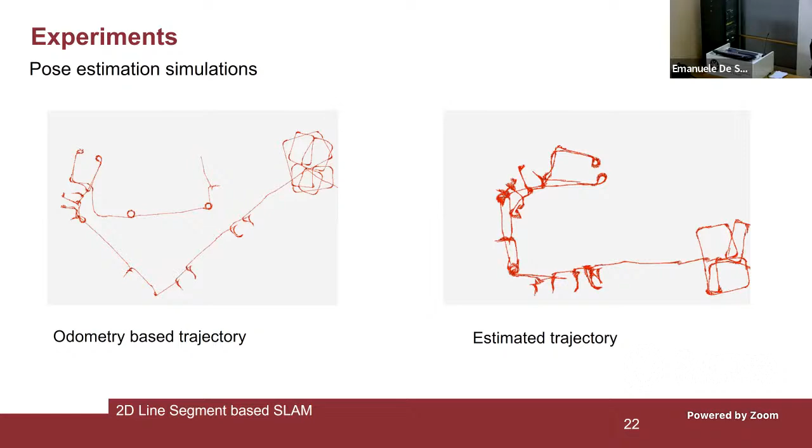To conclude, we have provided a line extraction algorithm that takes scanner points along with the noise model into consideration, an iterative closest line mechanism that has been developed to estimate the robot trajectory, and a data association mechanism to determine corresponding sets of inlier lines.

Future work includes a mechanism to determine previously visited landmarks to tackle loop closure more effectively, a global optimization of the mapping of lines with respect to estimated poses, and more complex features like blobs or curves may be implemented and taken into consideration later.

I thank you all for your attention, and I'll be happy to answer any questions.

Any questions for Imam? Before that, I have one.

I think there are many line extraction algorithms, and indeed your interest here is in the context of SLAM. So you're looking at sequential images and how you relate the information you've gathered so far to improve the next information. Can you specify the special contribution of your thesis in this field with respect to the state of the art? The contribution of the thesis is basically taking the line, not using standard image-based algorithms, but the estimation of line segments.

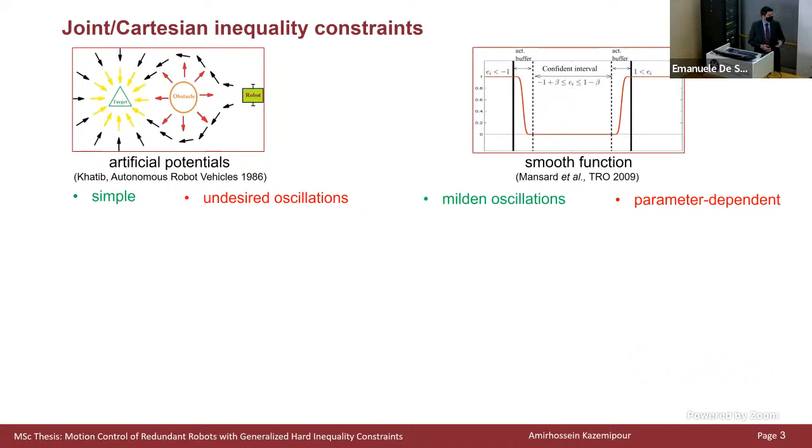Now let us quickly review the state of the art. So a conventional method for satisfying joint and Cartesian inequalities is to use artificial potentials, which can also be combined with some smooth activation functions. But the downside is that they usually suffer from oscillations, or they require parameter tuning to select the most appropriate parameters. As an alternative, we can use constrained optimization techniques, such as quadratic programming, by basically transforming the task into least squares problems. However, these numerical methods tend to be computationally expensive, and they do not always give us a realizable solution.

And finally, we have the saturation in the null space, or SNS for short, which connects the quadratic programming to the stack of tasks approach and overcomes all these challenges. So in the original paper, the joint motion limits were treated as hard bounds that can never be violated. However, the hard bounds in the Cartesian space were not explicitly taken into account. Now let's move on.

So here are the contributions of our work. So here we propose a generalized version of the saturation in the null space method that explicitly takes into account both joint and Cartesian inequality constraints in a unified manner. Therefore, all the constraints have the same priority. And also, these constraints can never be violated, so they are treated as hard bounds. And we can modify these constraints online and in real time without undergoing any parameter tuning phase in response to any modifications that can happen in the set of constraints.

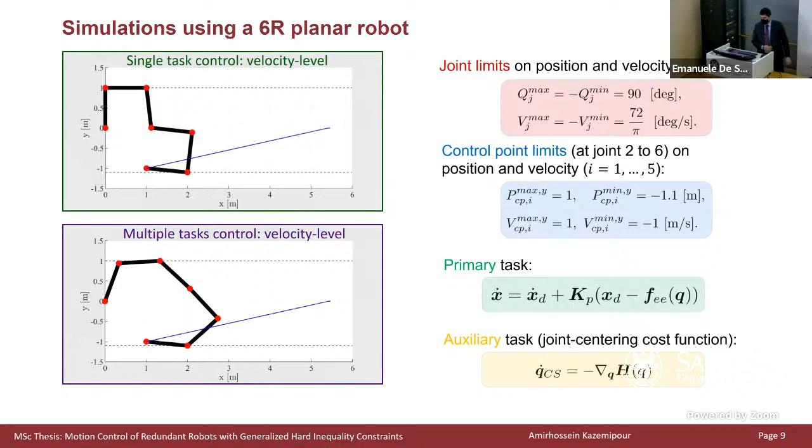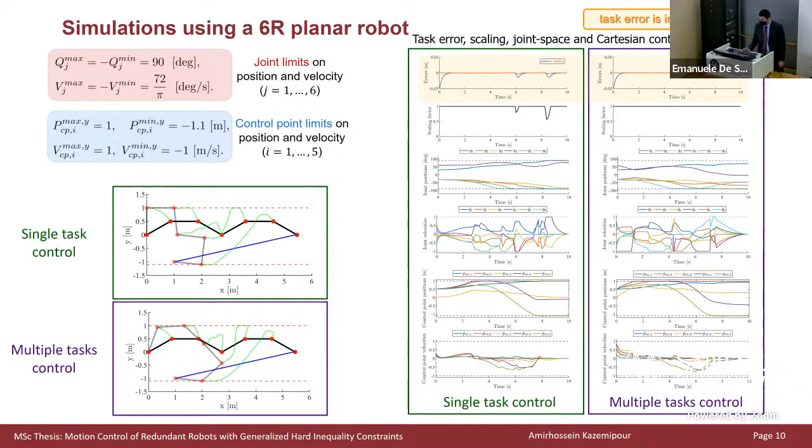We have also validated our framework using experiments with the KUKA lightweight robots that we have in the lab. So in the first experiment, we considered a single control point at the elbow of the robot. And so we considered some fixed joint and Cartesian limits, and we also imposed some time-varying constraints on the position of the elbow that are imposed only for some short time intervals.

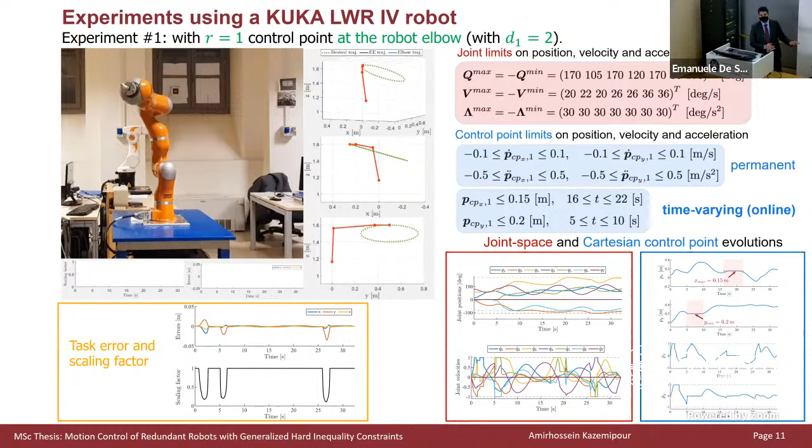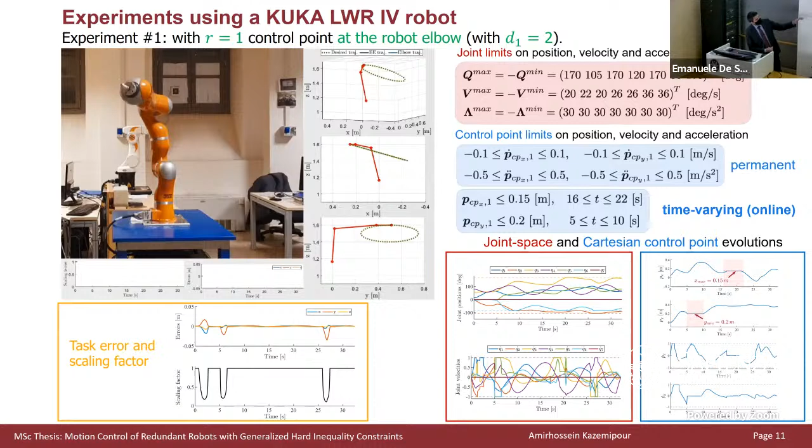So as you can see from the video, the desired end effector task is to track a circle 3 times. And as you can see, the robot does a great job at fulfilling this primary task while satisfying all the generalized constraints. And you can see how well our controller reacts to the time-varying constraints in the y direction. And finally, the scaling strategy that we have implemented, as you can see, nicely keeps the geometry of the path, therefore ensuring its usability.

In the second experiment, again, we consider a single control point, but this time at the end effector of the robot. Here we also considered a more demanding task with a higher velocity to essentially bring the robot up to its physical limitations. Again, we imposed some fixed joint and Cartesian limits, and we also considered time-dependent constraints on the position of the end effector.

So as you can see from the video, here the desired end effector task is to follow a circle 3 times. And as you can see here, the time-dependent constraints that we have imposed in fact conflict with the primary end effector task. So during this time interval, the end effector saturates to its limit to comply with the constraint. And in fact, as you can see, during the second round of the trajectory, the circle is nicely cut without showing any oscillations.

Okay, so we have also extended the previous algorithm at the acceleration level command. This is in fact the most complex algorithm among all the ones that we have developed. We can use this in situations where the robot has to perform some dynamic tasks, or we can use it with, for example, an inverse dynamics controller to command also torque-controlled robots.

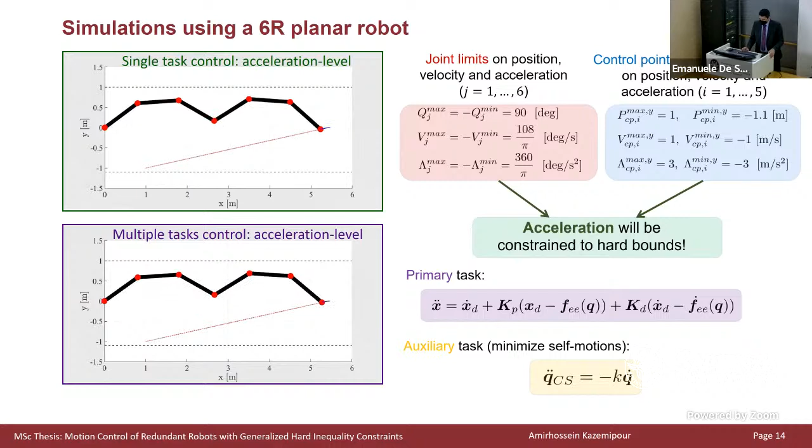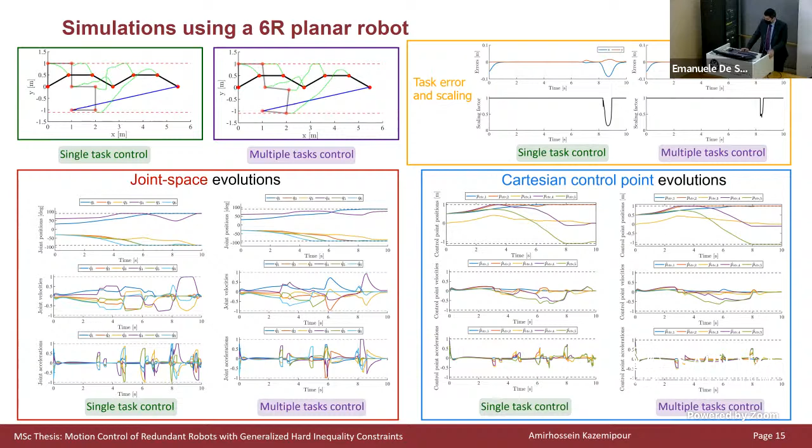Okay, let's move on. We also validated our framework at the acceleration level command, again considering a 6-DOF planar robot here. And as you can see again, in both single task and multiple task control, the task is perfectly executed. And also all the constraints are satisfied, as you can see from the joint space and Cartesian control point evolutions. And again, with multiple task control, the task error is greatly improved compared to the single task control.

So as conclusions, let me wrap up the main points. So in this work, we presented several motion control algorithms for redundancy resolution, considering joint and Cartesian hard inequality constraints. And the resulting control algorithms that we have developed in this work, in fact, can be regarded as a generic toolbox that can be used in a variety of robotic operations. In fact, the main advantages of our framework are performance and the ability to adapt to sudden changes in the time-varying constraints.

So as our framework can handle time-dependent constraints, we can basically incorporate it into any sensor-based strategy, for instance, in human-robot collaborations, to prevent collisions between humans or other robots.

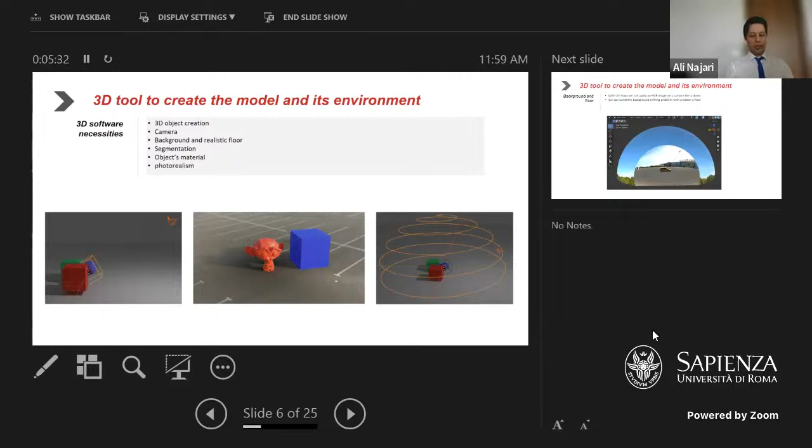Okay, in terms of simulation of the background and the floor, as we didn't want to simulate everything in the scene, for example, we didn't want to simulate a building, trees and other stuff in the scene, we just used the 2D image, and by UV maps, we mapped this image on a surface like a dome, as you can see here in this picture. And with this method, we can avoid the background shifting problem with the creation of floors.

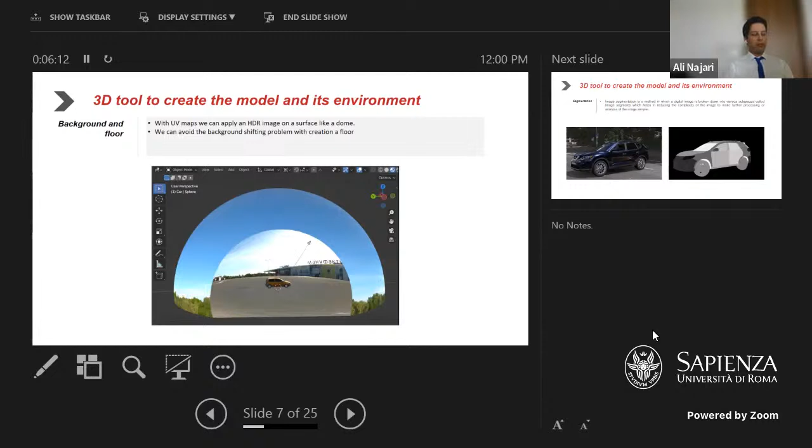And in terms of the segmentation, as you can see here in the car model, image segmentation actually is a method in which a digital image is broken into various subgroups called image segments, which helps in reducing the complexity of the image to make further processing or analysis of the image simpler. And in the right figure, you can see a segmented image from the car model.

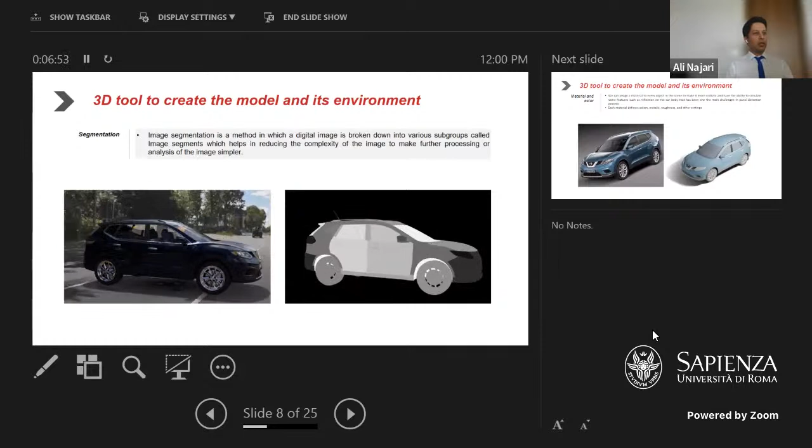And in terms of the material and color in Blender software, we can assign a material to every object in the scene to make it more realistic and have the ability to simulate some features such as reflection on the car body, which has been one of the main challenges in the panel detection process. Each material defines different features such as colors, metallicness, roughness, and other settings.

As you can see here, the right picture is a simple one. By changing the material, the color, and other settings, we were able to create a car model that is really like a real car.

And in terms of photorealism, the key to making photorealistic material is to reproduce imperfections. As you can see in the picture, we are able to easily simulate the reflections of the trees and the light, and also the different materials that we use for the scene preparation, such as plastic, leather, and metal, you can see in this image.

Okay, in terms of Blender workflow, we should have our 3D scene. Then we are going to define a new path and set the camera to this path. We are going to enable a new car model, as we already have different car models in the prepared scene. Then we select a new background. There will be also different backgrounds, and we start the rendering scene with a specific color.

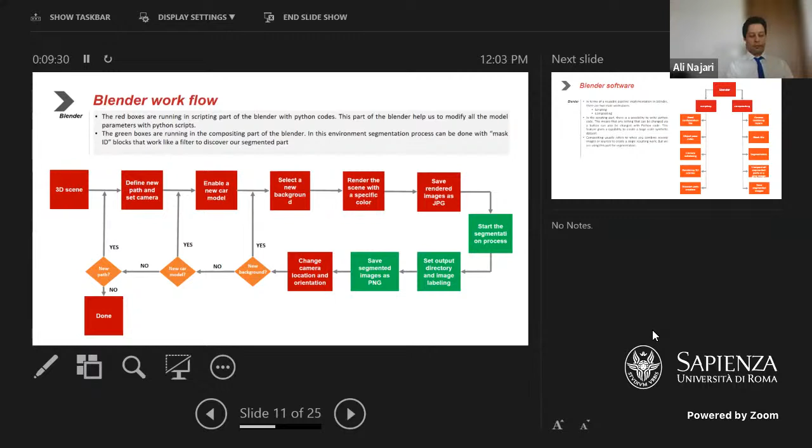If there is not, we go to the next step to enable a new car model. Then we go to other steps. If there is not any new car model, we go through the new path and other steps. When we have done all these loops, we are finished with the process of rendering.

In terms of Blender software, we are using two main workspaces. The first one is scripting, and the second is compositing. In the scripting part, we are going to do read configuration file, dedication of pass indexes, camera initializing, rendering 3D scenes, and random path creation. In the compositing part, we are doing access rendering layers, mask IDs, segmentation, compact all segmented parts in a gray image, and save all the segmented images.

And in the scripting workspace of Blender, we have a configuration file. This file is a CSV file where all the car parts with a standard name are listed. We are using these names to find the related object in the scene. Then we go to dedication of the pass index.

The camera position and orientation can be modified with two different methods. One is orbital point of view, and the other is to define a path and set the camera to follow this path. In the final version of this pipeline, we are using the second method. In the rendering part, we are choosing the quality and the output format of the 2D image plus the directory. We are going to save the rendered image in this step.

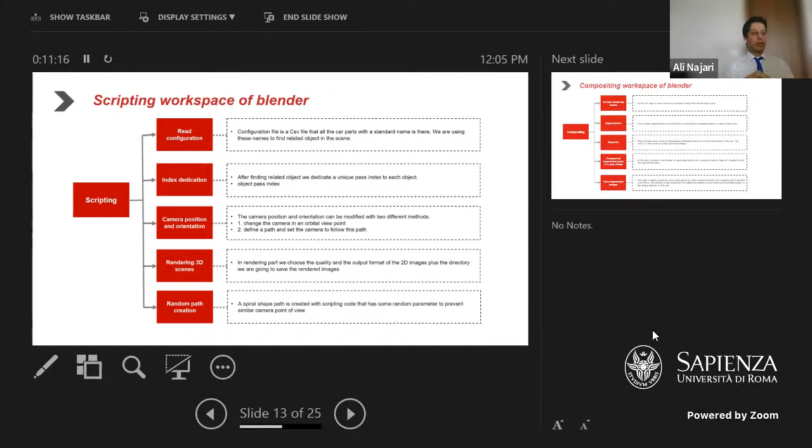And a spiral shape path is also created with the scripting code that has some random parameters to prevent similar camera points of view. And in the compositing part, at first we need to have access to the rendered image from the render layer node. Then we go through grayscale segmentation in the compositing workspace based on object pass index.

And mask IDs are some nodes in the compositing workspace that let us find each panel of the car. The output of this block is white and black images. Then all these white and black images need to be compacted to a gray image. We are going to do it in the next step. And we also need to define a directory and a new name for every rendered image for the scripting part to prevent overwriting.

For the post-processing, we need to read necessary directories, read the YAML configuration file, and consider necessary annotation merging. Then we open the main directory and read the rendered image.

At the next step, the related segmented image should be read. By reading this segmented image, we are able to generate all the information necessary for our large-scale dataset: polygonal annotations, bounding box annotations, image IDs, and category IDs.

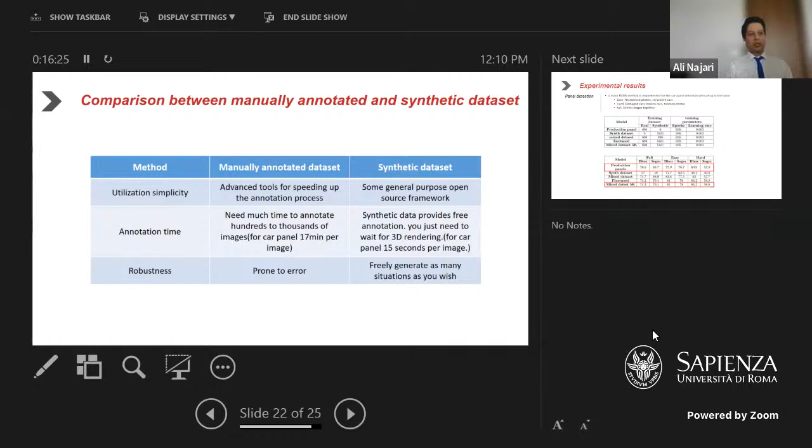And in terms of robustness, manually annotated datasets are prone to errors, but in the synthetic dataset we can freely generate as many situations as we want.

In terms of the experimental results, we used the generated dataset with this pipeline and a deep learning method called mask RCNN, implemented for car panel detection with the setup shown in this table.

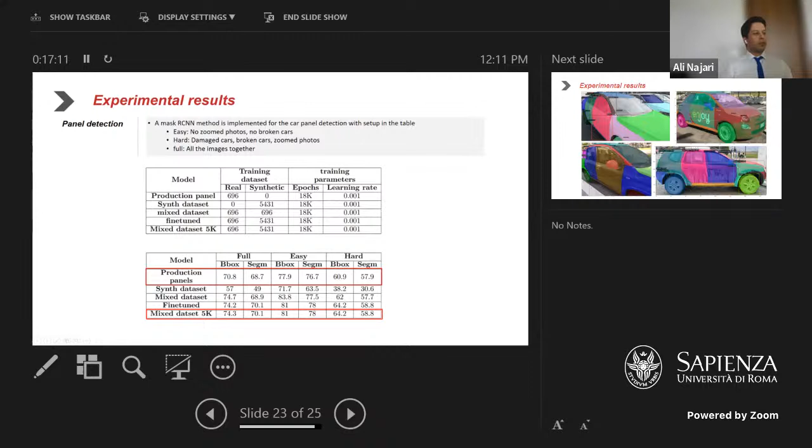As you can see here, for the mixed dataset of 5,000 images, we were able to improve the final results of this panel detection method. And these are some results about this panel detection algorithm.

As you can see, the method was able to detect different panels of the car with a certain level of precision.

In terms of conclusion, we developed a methodology that generates a reusable pipeline. This methodology has been validated with the generation of a synthetic car dataset.

Human labeled datasets are expensive and time-consuming. We can complete this time-consuming and costly procedure in the shortest amount of time, and a mixed dataset of human labeled data and synthetic data can yield better final results. The whole pipeline is also implemented on the cloud.

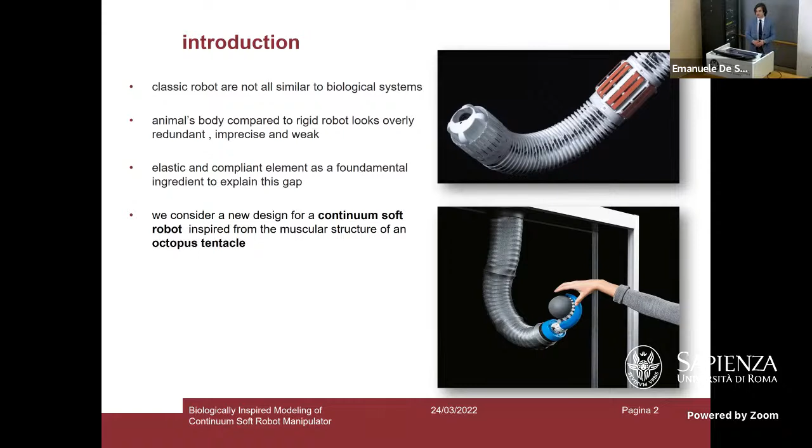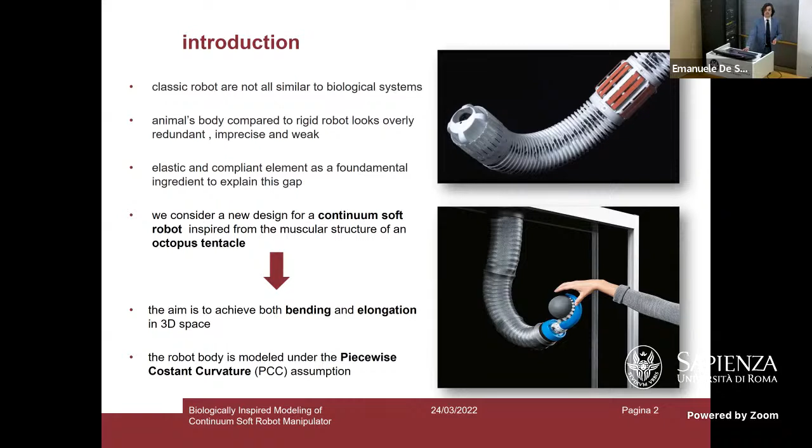In this work, we consider a new design for a continuum soft robot inspired by an octopus tentacle. The aim is to achieve both bending and elongation in 3D space. Finally, the body of the robot is modeled under the piecewise constant curvature assumption.

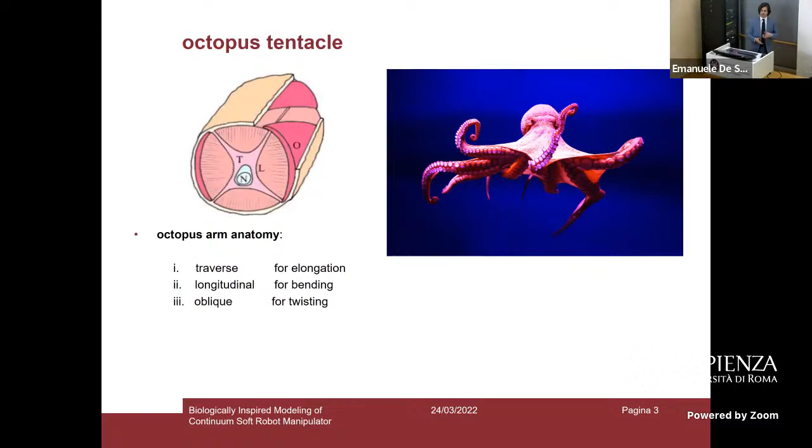If we consider the octopus, they are a great example of dexterous animals found in nature. In their arms, the muscular structure is organized mainly into 3 groups: the transverse muscle for elongation, longitudinal for bending, and oblique for twisting. What we do is merge the elongation and bending features into 4 pneumatic artificial muscles able to change in length.

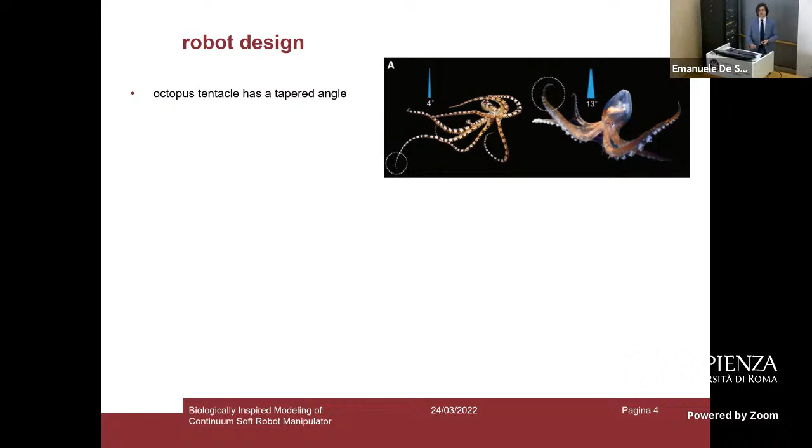Commonly, in the state of the art, a cylindrical structure is used in order to replicate a biologically inspired segment. However, we have to consider that in nature, an octopus tentacle has a tapered angle. So here we come with our design: four constant curvature actuators displaced every 90 degrees that can change in length and elongate the structure of the segment, changing the tapered angle.

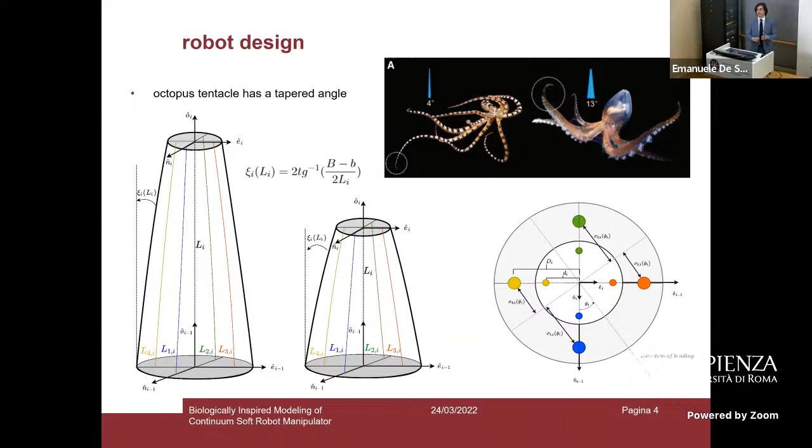But to describe what happens when the tapered segment bends, we need at least 3 variables: Phi, the angle between the plane NO and the curvature plane; Theta, the relative rotation between 2 reference frames on the bending plane; and delta L, the change in length of the backbone segment. We are going to call this choice of variables the alpha parameterization.

Moreover, the tapered segment is advantageous for the arm's mobility since it allocates more torque to the segment closer to the base. However, it introduces a quite difficult challenge since the 4 arcs bend on non-parallel planes. We solve this issue with an exact geometric solution that gives us the length of each cable when the segment is bending as a function of the alpha parameterization.

So entering the kinematic modeling, a piecewise constant curvature robot is composed of a fixed number of segments continuously deformable, with a curvature that is constant in space and variable in time. The homogeneous transformation matrix T maps the posture of 2 consecutive reference frames, and we can give it a geometric interpretation since we can consider it as a rotation around the z-axis of an angle phi, times the multiplication of a roto-translation until we reach the next frame on top of the segment, and then we come back in the original framework with a rotation of minus phi around again the z-axis.

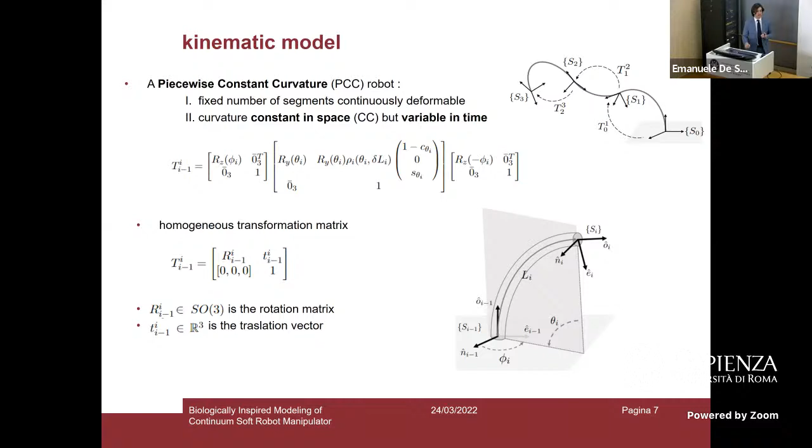But the alpha parameterization is affected by mainly three problems. First, the straight configuration can be described by an infinite choice of the variable alpha. In fact, the homogeneous transformation matrix is not an isomorphism. That means we could wrongly think that keeping the angle theta constant at 0 and varying the angle phi could generate motion, but that's not the case. Second, two different configurations that share those properties describe the same posture.

And finally, closeness in the task space is not equivalent to closeness in the configuration space. But how to solve this issue? In fact, it's just a matter of parameterization. If we choose to project the angle theta along the x and the y axis, we solve all three issues. We're going to call this parameterization the Q parameterization.

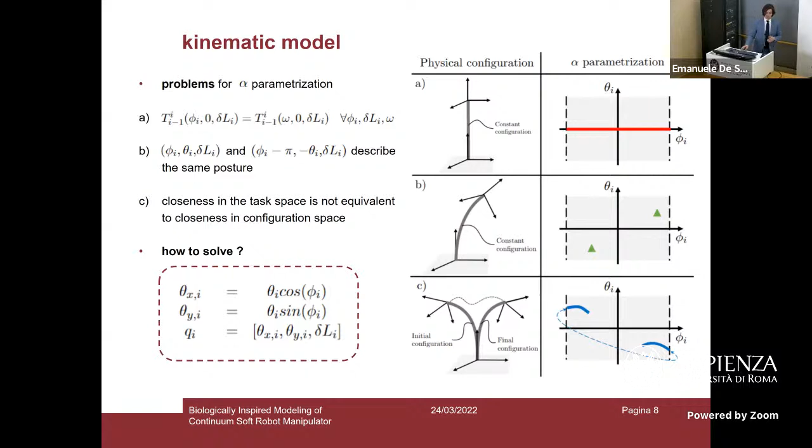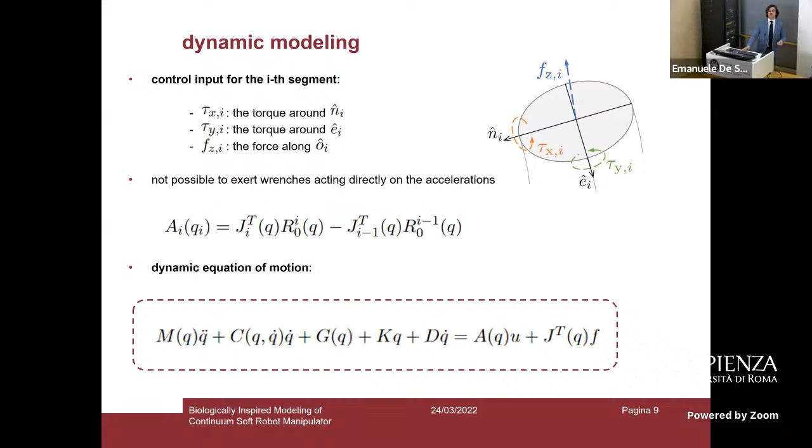For the control input of each segment, we consider the wrenches composed by tau x, the torque around the n-axis, tau y, the torque around E, and the force along the O-axis. However, we have to consider that it's not possible to exert wrenches directly on the acceleration, so we need an input mapping A. And since the wrench is internal of the segment, we have to consider that at the previous link, an opposite wrench appears. Then, by means of an Euler-Lagrangian approach, we derive the dynamic equation of motion.

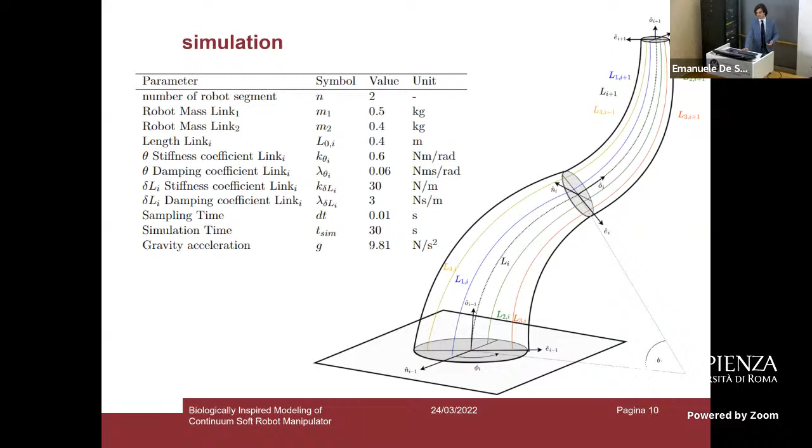We start from an initial configuration that is straight facing downward, which recall was a singular configuration for the alpha parameterization. We will plan in alpha and then move to Q, just because the alpha parameterization is meaningful with respect to the direct representation of the posture of the robot.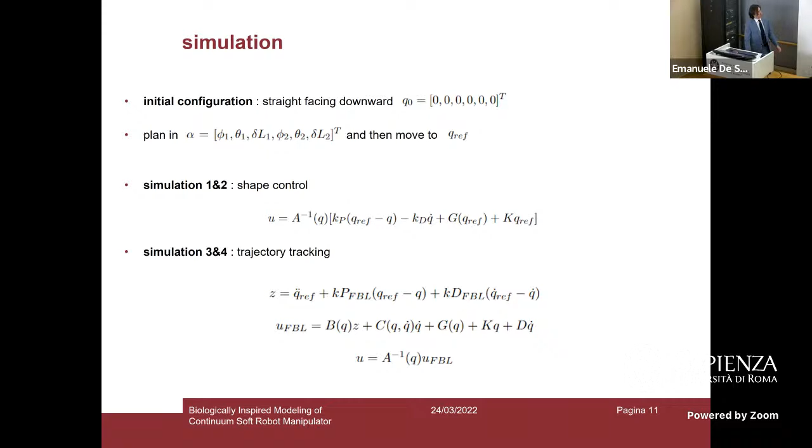We're going to see two simulation scenarios. The first will address the shape control of the robot, using a control law composed by a PD plus a gravity cancellation term. For the last two sets of simulations, we will address the trajectory tracking problem, using a feedback linearization control law.

So for the first simulation, we ask the robot to reach two different configurations, alpha 1 and, after 15 seconds, alpha 2. Recall that we have to move to the Q parameterization and compute Q1 and Q2.

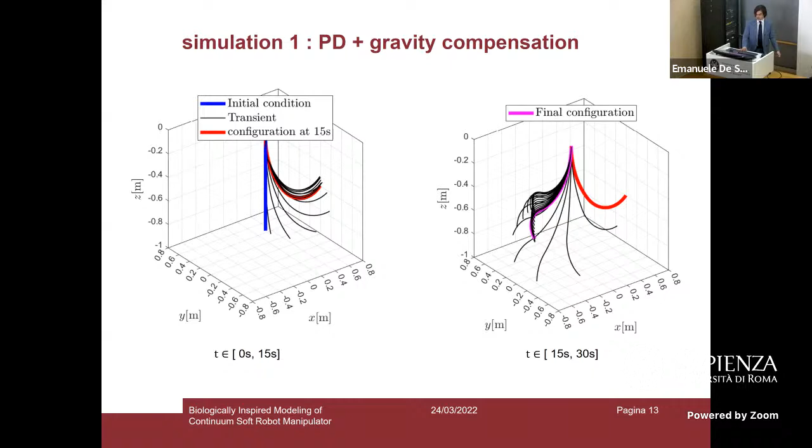Here we can have a visualization of what is happening. From the first picture, we see the first 15 seconds. In blue is the initial configuration. The robot is starting from a straight facing down configuration and then quickly moves to the first configuration in red. Then in the other plot, we start from the previous configuration and reach the final reference in purple.

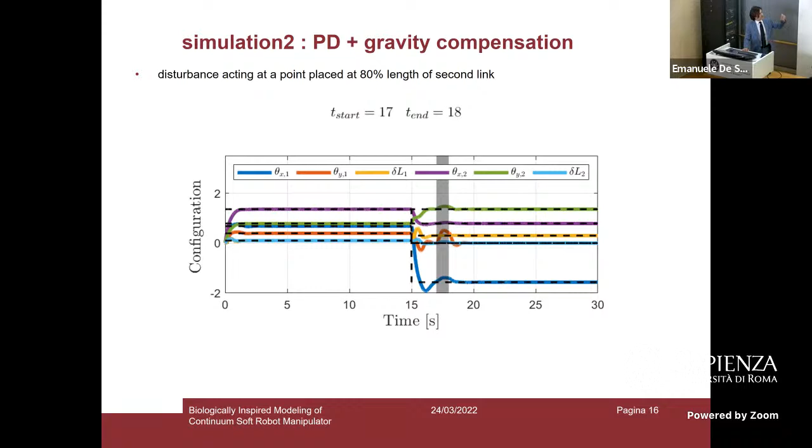Now for the second scenario and the third simulation, we ask the robot to move from configuration alpha 1 and reach configuration alpha 2 using a specific trajectory. We compute this trajectory in Q as a quintic polynomial.

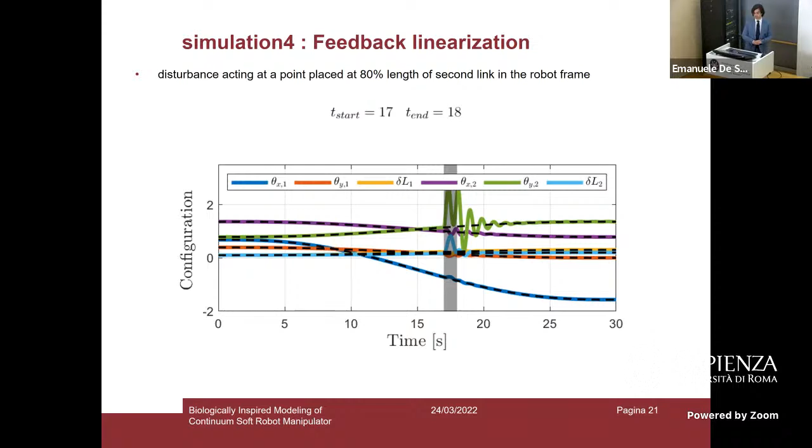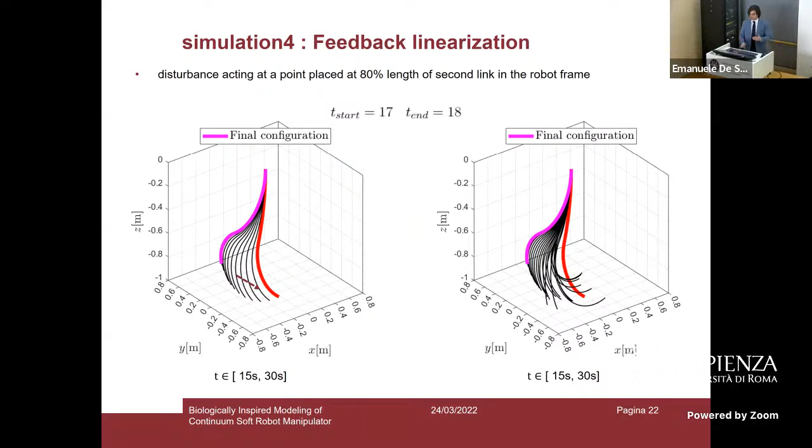Here we see how the robot behaves differently when the same disturbance acts at 80% length of the second link. In fact, we see that the robot starts to oscillate when the disturbance acts. So the red arrow again is the disturbance acting on the robot, and we see that the robot starts to physically oscillate until it comes back to the desired configuration. This reflects also in the error and in the input of the system.

So to conclude, we have presented a new design for a tapered, pneumatically actuated, soft robotic arm. And this work represents a great example of biomimetics, that means the translation of biology into robotics. We have validated the model in 3D environment for a PCC soft robot while performing bending and elongation maneuvers.

For what concerns further development, there are open challenges in sensing and proprioception, and moreover, we could add twisting features, and more important, there could be a model extension to include also a carried payload.

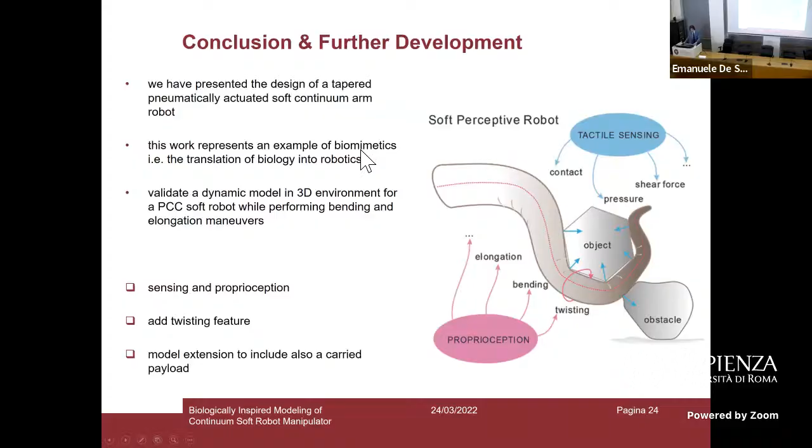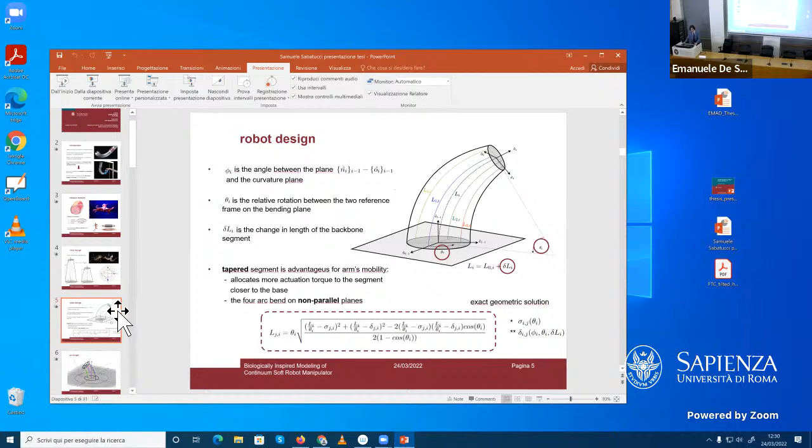Because we don't consider the twisting maneuver in the model. So we just consider that when we consider the segment that bends, we see that the bending does not affect the orientation of the top reference of the segment. That's a feature that could be added in the follow-up of this work.

Yes, it's exactly that. It's a plane, but could be any plane. Okay. In fact, it is correct to say that you can have one bending plane for the first segment and a different bending plane, so that you get torsion through the segments. Between segments. Yes, between the 2 segments and have different bending planes. Not within the segment. Sure.

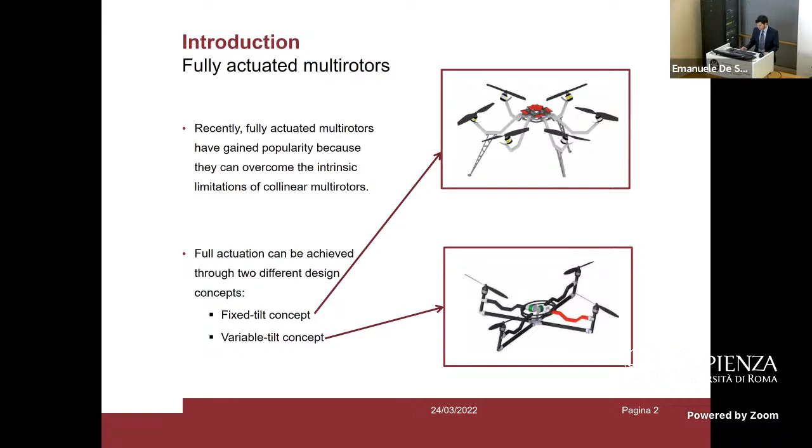The fault-tolerant control problem is the problem of controlling the multirotor, dealing with possible faults of the component. The objective is to propose an active control strategy in order to address both light and severe faults when the hexarotor is asked to follow a trajectory. It is active because it is based on a chain of two fundamental tasks: the fault diagnosis, which gathers the information about the fault, and the control reconfiguration, which accommodates the fault on the basis of this information.

We are focusing on a particular family of hexarotors, the alpha, beta, gamma hexarotor. In fact, since the i-th propeller is generically tilted, its orientation and position are parameterized by the angles alpha, beta, and gamma. As we can see in the top figure on the right, these three angles represent the rotations around the three axes, X, Y, and Z.

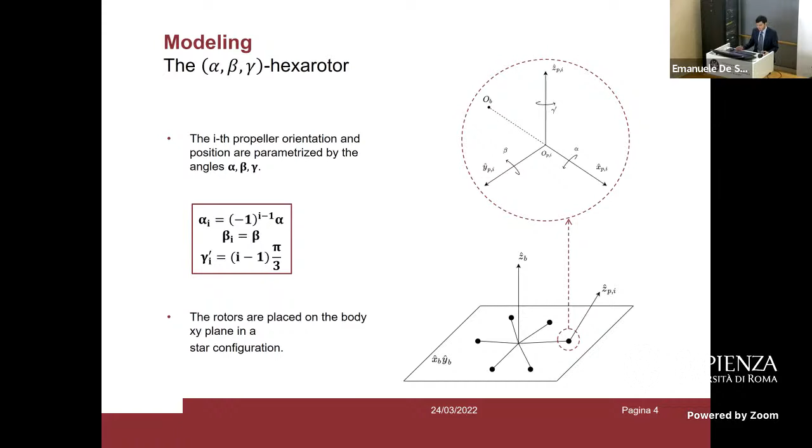With the choices made for this work, which are reported in the red rectangle, the hexarotor is considered with the propellers placed on a plane, the XY plane of the body, with a star configuration. The thrust is developed along the Z_Pi direction that we can see in the figure below, and this is determined by the angles alpha and beta in particular.

So from the Newton-Euler equations, which we can see in the first rectangle, we can derive a dynamic model where the position P is the position of the center of mass of the drone, V is the translational velocity of the center of mass, and as previously said, the attitude is represented in the special orthogonal group through the rotation matrix R. The angular velocity is omega expressed in the body frame. The inertia matrix J is diagonal.

Moreover, in a realistic scenario, we would have inputs to the system which are aerodynamic disturbances, external disturbances, and the gyroscopic torque. Moreover, in the equation there is the appearance of the wrench, which is Fc, tau c, so the vector of force and torque delivered by the fact that the propellers are spinning.

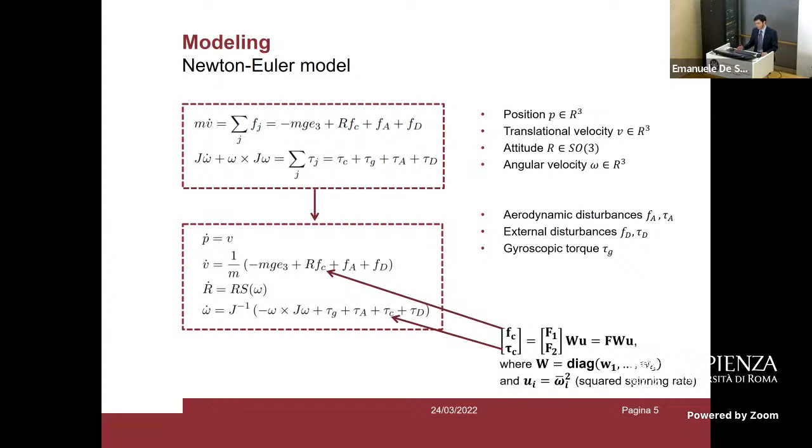So we are considering the actual control input U, which is taken as the square of the spinning rates, and it is mapped to the wrench through the input allocation matrix F, which is divided in F1 and F2. F1 maps the input to the force, and F2 maps the input to the torque tau c. Moreover, since we are dealing with faults, there is the pre-multiplication of the input U by this diagonal matrix W, which is made of the weights. Wi, in fact, is the i-th multiplicative weight, which represents the fault on the i-th rotor.

Through the study of the input allocation matrix, we discovered that the healthy hexarotor is decoupled and fully actuated, while instead the hexarotor with a loss of a rotor or two opposite rotors has a single decoupled direction. Decoupled means that the attitude and position subsystems are decoupled from one another.

In fact, we can define a direction which is called the preferential direction, which is in the kernel of F2, so the null space of the F2 matrix, and this can be mapped in the force space through the F1 matrix, defining d. The idea is that acting along this direction with the control, we can develop a force along d in the body frame which does not change the attitude.

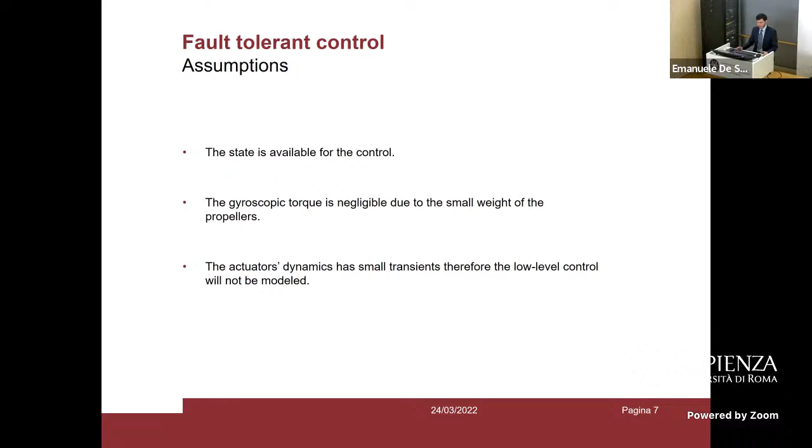The assumptions made for the control are that the state is available at any time, the gyroscopic torque is negligible, and the actuator dynamics have a small transient, therefore we will not include the low-level control. Here we can see an overview of the general control scheme.

In particular, below there is the fault diagnosis block, which provides an estimate of the multiplicative weight, W hat. On the left, this vector is tested in the logic condition. If all the components are greater than or equal to some threshold T, then the FA control law, which stands for fully actuated, is enabled and tries to preserve the full actuation of the hexarotor while dealing with light faults. Instead, if a component is less than the threshold, the control law is switched to the under-actuated control law.

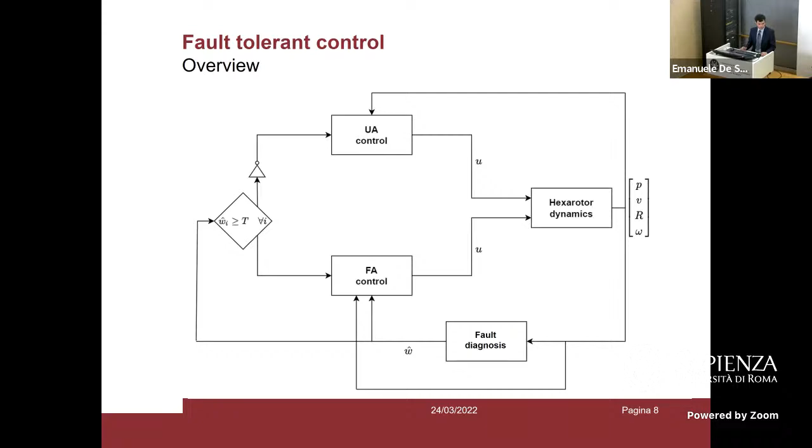Here we can see a detail of the FA control scheme. In particular, on the left, we have the references down to the acceleration level in terms of attitude and position. Then we have two blocks, the attitude stabilization and position stabilization blocks, which provide the high-level commands in terms of torque and force.

The torque tau c is developed using a geometric control on the special orthogonal group, while Fc, the force needed for the position control, is a PD plus gravity cancellation. The control allocation, on the basis of the estimate coming from the fault diagnosis, will deliver the actual control to the hexarotor, U.

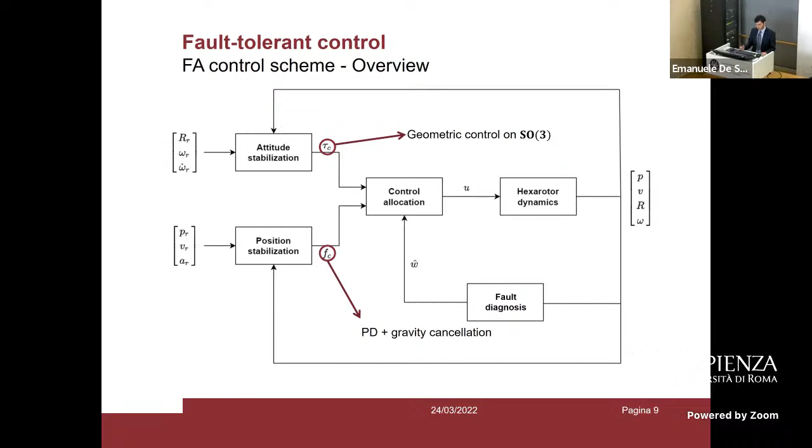As previously said, the fault diagnosis is implemented using a nonlinear disturbance observer, lambda, whose expression is in the first equation in the slide. We can see that there is the appearance of the H matrix, which is a diagonal matrix made of gains, which determine the convergence. Defining the estimation error, W tilde, which is W, the ground truth, minus the estimate, its dynamics is a linear time varying dynamics with input W dot.

So we can prove that the estimation error is bounded. And for this reason, also the closed loop system can be proved to be ultimately bounded. Moreover, another important result is that the control system is converging input, converging state, so CICS, with respect to the estimation error. This means that if the estimation error goes to 0, then the tracking errors also will converge.

In the case of a loss of a rotor or two opposite rotors, we have an underactuated system, so the control law is switched. And in order to prioritize the position tracking, we are using a nested feedback control structure, a classic one, where the position control will drive the attitude subsystem through the generation of a planned attitude represented by RP, the rotation matrix. This rotation matrix is aligning the preferential direction D to the desired force, which is needed for the position control. This means that D is conceptually similar to the upwards direction in case of classical collinear multirotors.

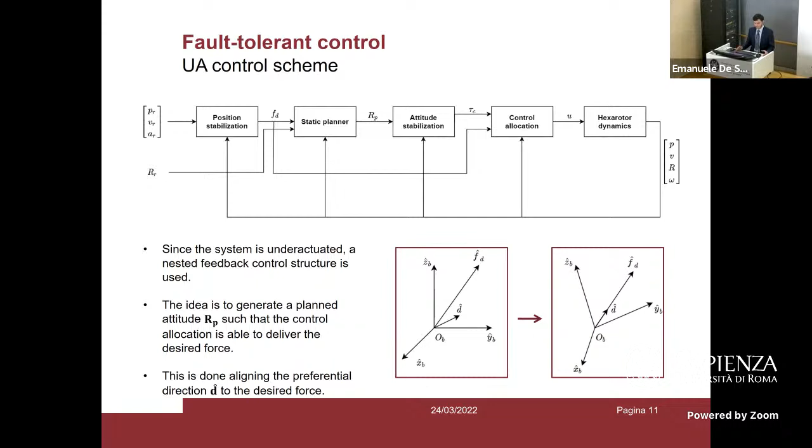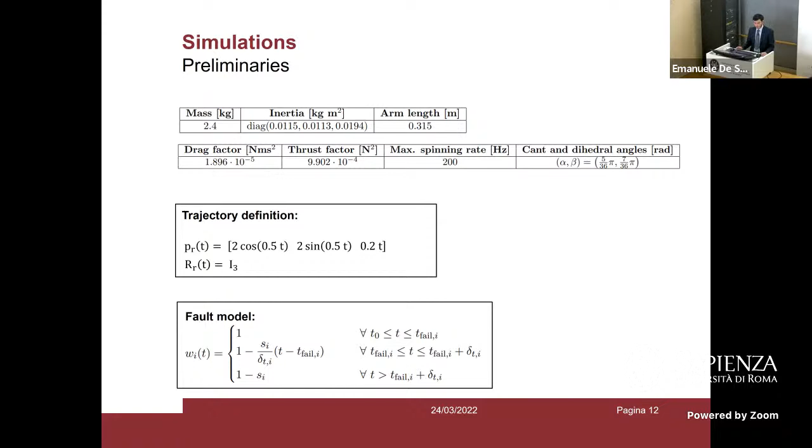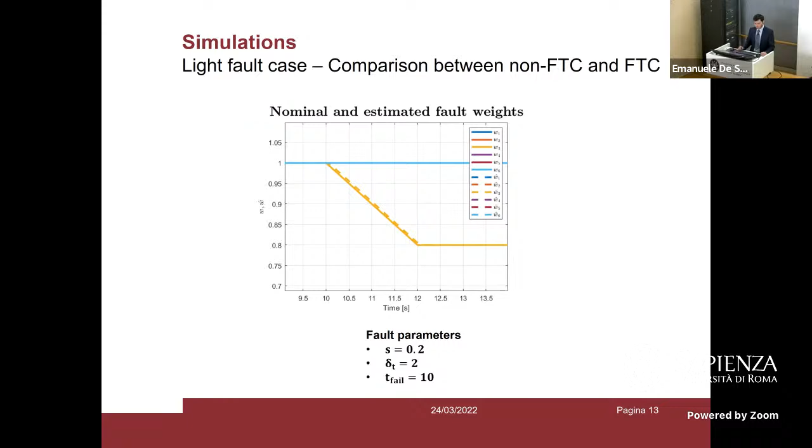The first case is the light fault case. So we introduce a light fault of severity 0.2 on the third rotor. In the plot, we can see the ground truth and the estimate performed by the nonlinear disturbance observer. During the transient, it's clear that the estimation is bounded but non-zero, while instead, at the end, when the fault stabilizes, it converges. In particular, we propose a comparison between a non-fault tolerant control and the fault tolerant control proposed in this work on the right.

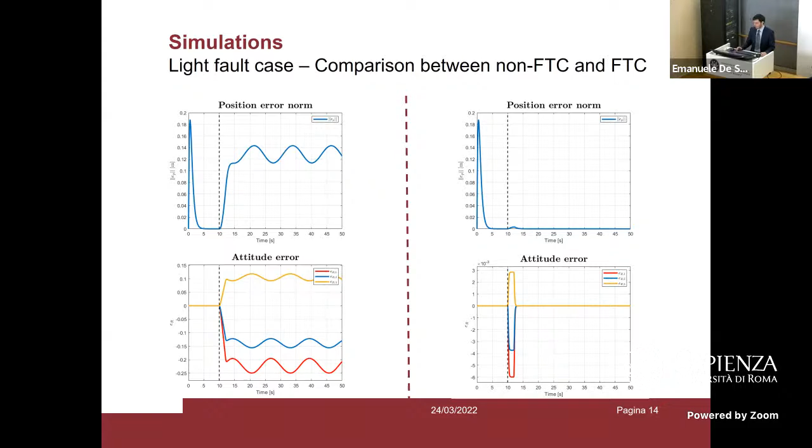Also, in terms of control efforts, so the spinning rate of the rotors, on the left, we can see that since the faulty component, so the third rotor, is not isolated, the error is distributed among all the rotors. While instead, on the right, the third rotor is isolated by the observer, and therefore it is increased in terms of spinning rate to compensate for the error. We can also see the 3D trajectory plots below, where the red dotted line is the reference, and instead the blue line is the actual trajectory of the multirotor.

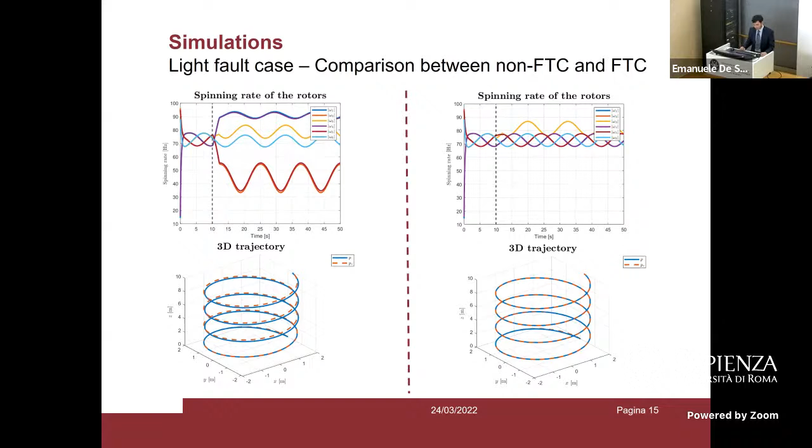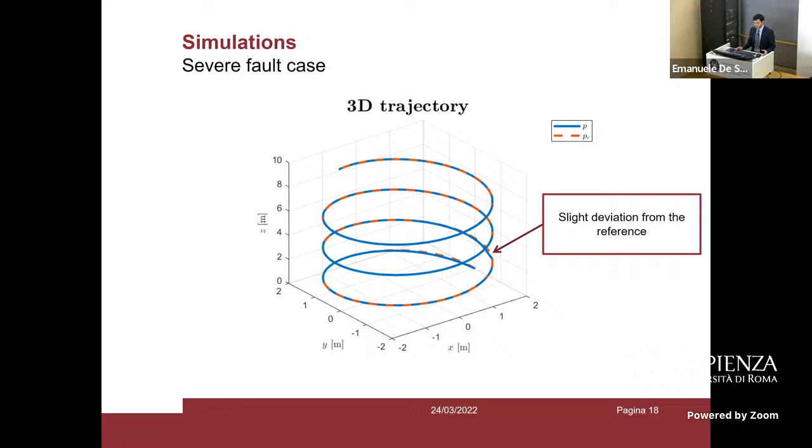So the proposed control scheme is able to identify and accommodate simultaneous light faults. It achieves good performances even in presence of a rotor loss when the position reference does not have abrupt changes. So we require the position reference to be smooth. The convergence is also highly dependent on the velocity of the fault, because if the faults act very quickly, the initial conditions when the control law is changed are more challenging for the control.

Possible improvements could be the inclusion of the actuators model, or we could find the bounds for the position trajectory in terms of its velocity and an estimate of the region of attraction that assures the ultimate boundedness property of the failed hexarotor. Moreover, we could implement the nonlinear disturbance observer also in the failed case. This would allow us to bear also light faults on the 4 remaining rotors.

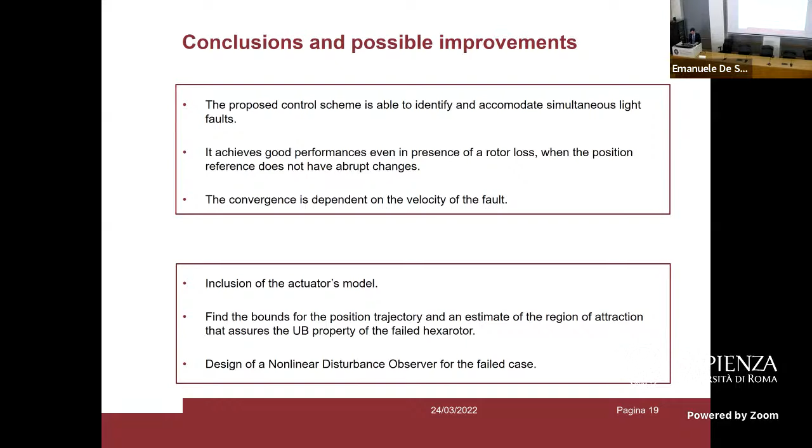Well, the idea is that if we have a fail on a rotor, we remain with 5 propellers available. And these would generate, due to the drag torque generated by each of the propellers, an imbalance in terms of symmetry of the control. While instead, if we switch off the opposite rotor, we remain with an even number of propellers. And therefore, the preferential direction, which can be found in the kernel of the F2 matrix, is balanced, symmetrical with respect to the 4 remaining rotors.

Okay. So you are exploiting the symmetry of the system. Yes. So what if you have a pentarotor and you have a failure, then there's no opposite. In that case, it depends obviously on the tilting angles of the pentarotor and the study of the kernel of the F2 matrix. The idea is to find this preferential direction. Everything is based on that.

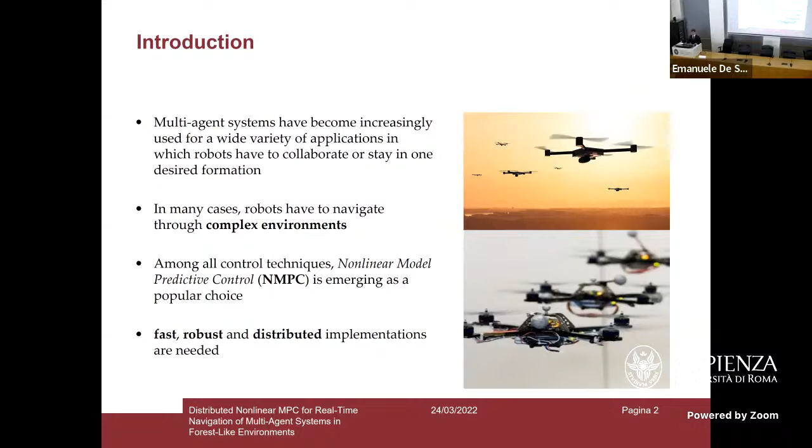Multi-agent systems have become increasingly used for a wide variety of applications, and in many cases, these robots have to navigate through complex environments while staying in a desired formation or while accomplishing many different kinds of tasks. To accomplish these tasks, we have a huge variety of control techniques. And among all available control techniques, nonlinear model predictive control is really emerging as a popular choice. For this reason, we need an algorithm which needs to be fast, distributed, and robust.

The thesis will address, first of all, the description of the agent dynamic model, and then we proceed by introducing the control objectives and basic concepts about distributed control. And after two assumptions, we describe the real-time NMPC and the Lagrange multiplier method, which is a novel idea of this thesis. The presentation will conclude by showing some simulation scenarios.

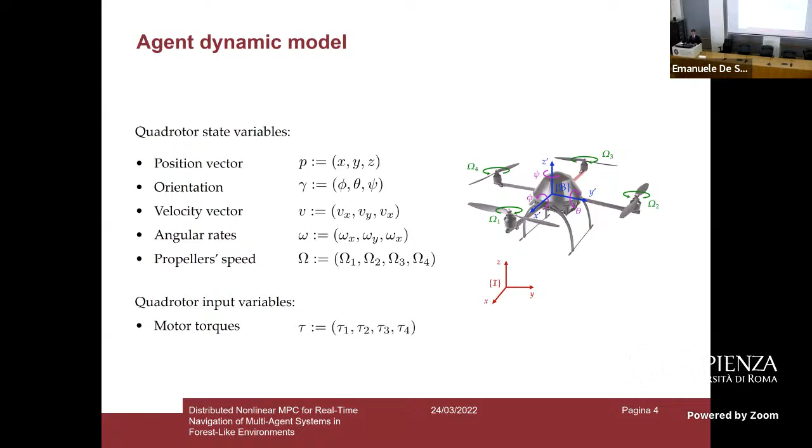So the agents we are considering are basically quadrotors actuated by brushless motors. And the quadrotor state variables are the position vector p, the orientation gamma, the velocity vector v, angular rates omega, and propellers' rotational speed capital Omega, while the inputs are motor torques.

Given a multi-agent system specified by initial and goal position for each agent of the formation, and given an environment which may contain static obstacles, we would like to use nonlinear model predictive control in order to obtain suboptimal control inputs for each robot of the multi-agent system. And this is done by solving a constrained multi-objective optimization problem at each sampling time. Also, for each agent, we would like to avoid any collision with static obstacles and with other agents, while minimizing a multi-objective cost function and respecting the physical limits of the quadrotors.

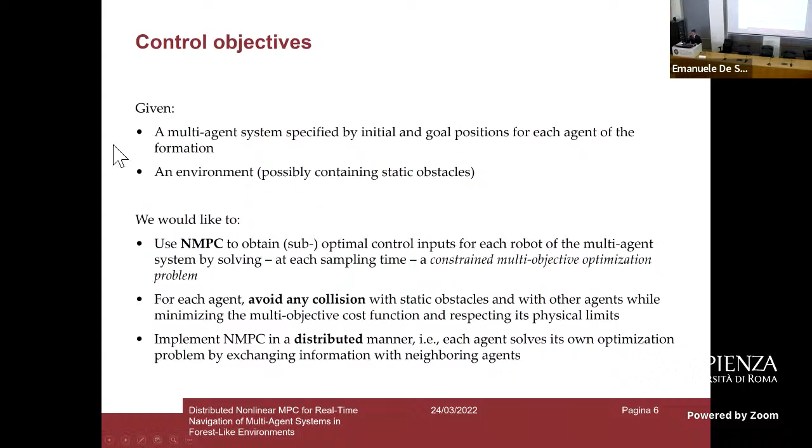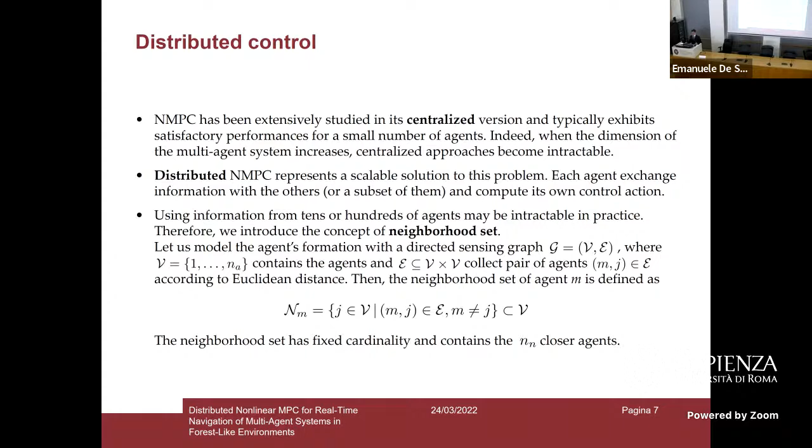The nonlinear model predictive control is implemented in a distributed way because we acknowledge the limitations of centralized approaches. And so we use distributed nonlinear model predictive control in order to have a scalable solution with respect to the number of agents in the formation. The formation is defined by using standard graph theory concepts, but here I want to focus on the idea behind the neighborhood set. So we define the neighborhood set of an agent M as the NN closest agents to the agent M itself, where the distance is measured through Euclidean distance.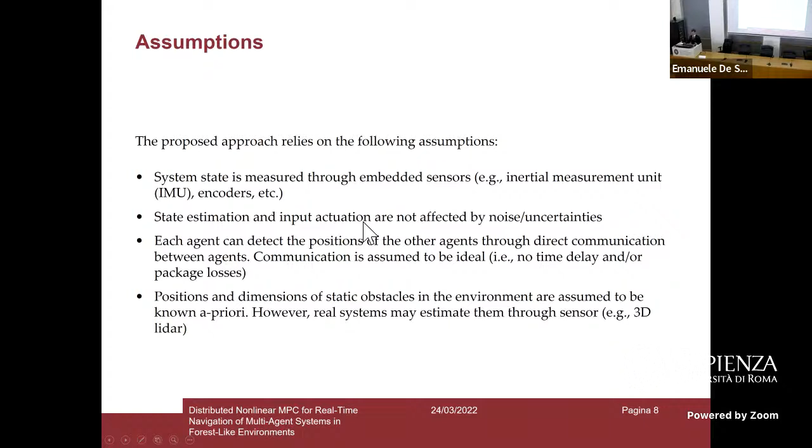A few assumptions are necessary. First of all, we assume that the state is measurable through embedded sensors. The state estimation and input actuation are not considered to be affected by any noise or source of uncertainty, and each agent can detect the position of the other agents through direct communication, and we assume this communication to be ideal. Also, the positions of the static obstacles are assumed to be known a priori.

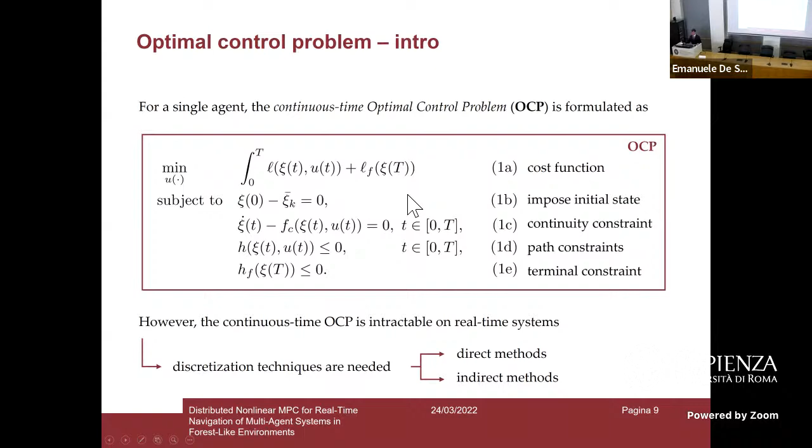With this in mind, we can introduce the optimal control problem, which is a classical one, and we have this continuous time optimal control problem, which is formulated as shown in this slide. So we minimize the cost function subject to some constraints. In particular, we impose an initial state. We have some continuity constraints based on the previously mentioned ordinary differential equations. And we have path constraints and terminal constraints that will be addressed later on. We have to mention that this OCP cannot be implemented as it is, but we need some discretization techniques. And in particular, we will use direct methods.

So the constraints of this system are various. First of all, we have physical limits of the motor, so we have the input torques, which are bounded in magnitude. Then we have the collision avoidance. We define collision avoidance with respect to static obstacles in the environment, which will be basically forest-like obstacles, so cylinders going from floor to ceiling. And we define a safety distance for both based on the physical parameters of the quadrotors and of the obstacles.

And we also enlarge these distances by using an epsilon. So we formulate the collision avoidance soft constraints as shown in this slide, where S_O and S_N underbar denote slack variables of proper dimensions.

Lastly, we have the cohesion constraint, in the sense that we want to constrain the system to be closer than a certain maximum communication distance, which is denoted by D bar AA.

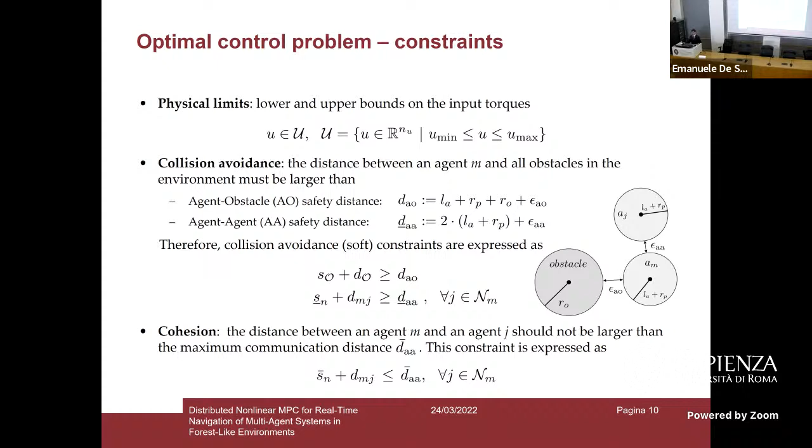The cost function is the summation of various terms. We have a tracking error penalizing the error with respect to the reference trajectory, a control error penalizing the error with respect to the reference control, and a cohesion term which penalizes the distance error with respect to the nominal one, where d_mj denotes the Euclidean distance between agent M and agent J.

And lastly, we have a constraint violation term penalizing the violation of the soft constraints by using L2 norm and L1 norm.

Finally, the optimal control problem is depicted in this slide, where we sum up all the terms of the cost function and impose all the constraints. In particular, we have the initial value constraints and the dynamics, which is integrated with an implicit Runge-Kutta method of the first order.

This optimal control problem is discretized by means of direct optimal control. I will not go into details here, but it is important to notice that the cost function, the function g collecting all equality constraints, and the function h collecting all inequality constraints are subject to some smoothness assumptions.

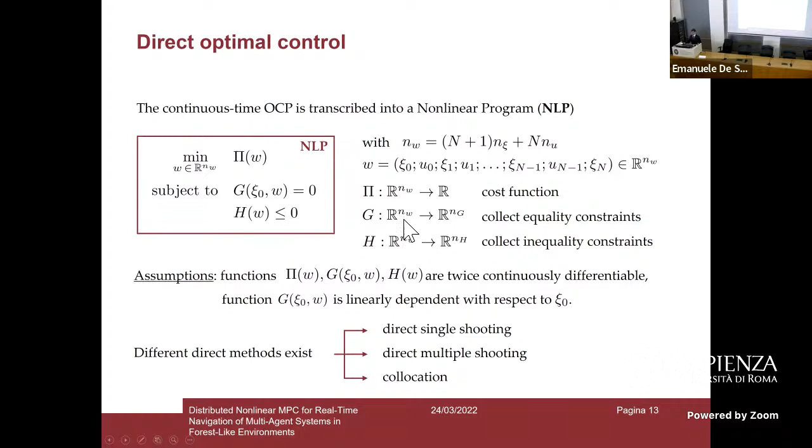There exist different methods to address this problem, and we use direct multiple shooting. First, we select a time grid, which is non-uniform in our case, because we claim that this kind of grid is able to guarantee a little bit of extra robustness with respect to a uniform one, and it is also well suited for future works.

We also discretize the controls and numerically simulate the ordinary differential equation. After that, we impose continuity constraints, and we discretize inequality constraints HI and HF.

So with the multiple shooting NLP, we can proceed by using sequential quadratic programming in order to solve the problem, solving at each iteration an inequality constrained quadratic program, which is an approximation of the shown NLP.

Lastly, we have the Lagrange multiplier method for online multi-objective and constraints prioritization. Since we have conflicting objectives, we would like to adapt the weight omega bar, which is the weight inside the cohesion term of the cost function, and update this term at runtime. Making use of the Lagrangian function, we derive it with respect to omega bar and obtain an update law for this vector, where mu denotes the Lagrange multipliers associated with an inequality constraint of an agent M at a shooting node I.

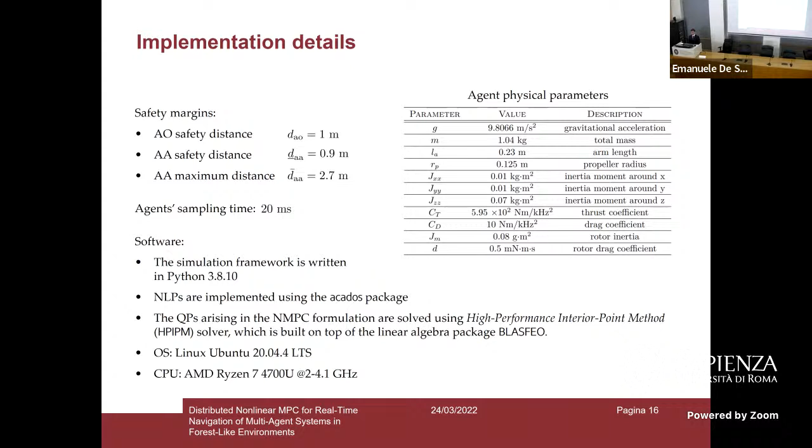Some implementation details: we assume an agent-obstacle safety distance DAO of 1 meter, while the agent-agent safety distance is 0.9 meters. An important value here is the sampling time of the system, which is 20 milliseconds, so our implementation should stay below this threshold. The whole framework is implemented in Python using the Acados package to address the NLP formulation, while the QPs arising from the NMPC are solved using a high-performance interior point method, which is a state-of-the-art solver.

The first scenario deals with the collision-free position swap. We have an octagon-shaped formation performing a collision-free position swap, and the idea is to stress the agent-agent collision avoidance. This scenario is really challenging from this point of view, and it returns useful metrics for tuning.

We concentrate our attention on only a few metrics. We can measure the solution time for different numbers of shooting intervals and different formations, and observe that the system is well below the threshold of 20 milliseconds, and it is highly scalable with respect to the number of agents because of the distributed implementation. We also notice that the size of the neighborhood set is quite important because it is directly related to the number of constraints of the optimization problem.

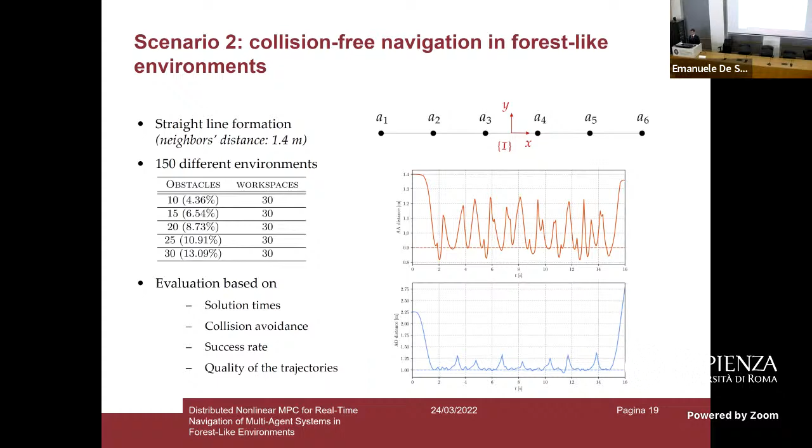From the picture on the right, we can notice that slight violations are present in the agent-agent distance, but they are really minimal and therefore acceptable because below the threshold of collision. The same holds for the agent-obstacle distance.

This is a simulation from a top and lateral view. Here we can appreciate the dynamic update of the neighborhood set, and we can also show how close to violation the constraints are.

By means of this sort of heat map, when the links become yellow it means that there is a violation, but it is possible to notice an aggressive reaction of the system in these circumstances.

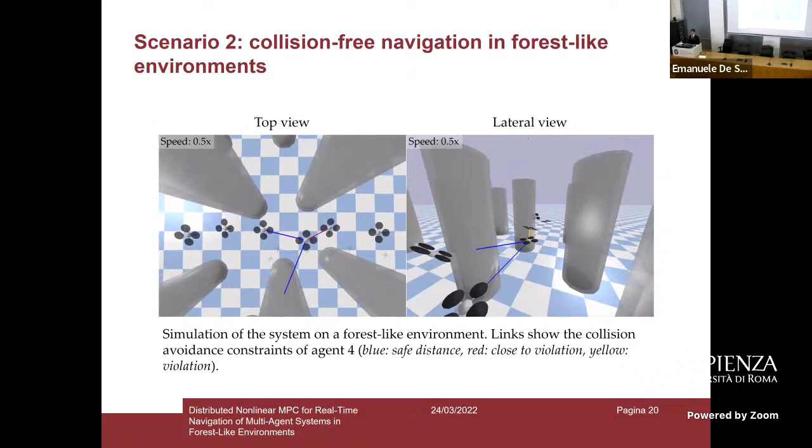As expected, collision avoidance is worse for high occupancy rates of the environment. On average, the Lagrange multiplier method improves the agent-agent and agent-obstacle collision avoidance, at least for high occupancy rates. The average solution time is between 1 and 2 milliseconds, which is coherent with our sampling time.

In conclusion, the proposed approach leads to satisfactory performance in terms of solution times, success rate, and collision avoidance. After more than 1,800 simulations, we have statistical results proving the robustness of the proposed approach. Also, the distributed approach, together with the use of the neighborhood set, makes the system highly scalable with respect to the number of agents in the formation, and the Lagrange multiplier method slightly improves the performance.

Future improvements may come from the introduction of communication blackouts, or from the use of high-level reference trajectories, or by testing other more complex formations. Thank you for your attention.

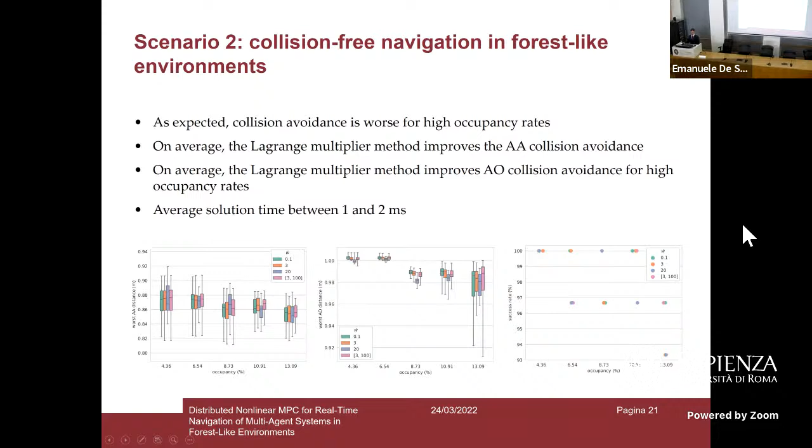Exactly, yes. Yes, yes. Exactly. Yeah. Exactly, sì.

Yes, but it is mostly related to the idea of using sequential quadratic programming, because we don't solve the optimization problem up to convergence, but we only solve the first iteration. This is the reason it is a suboptimal solution.